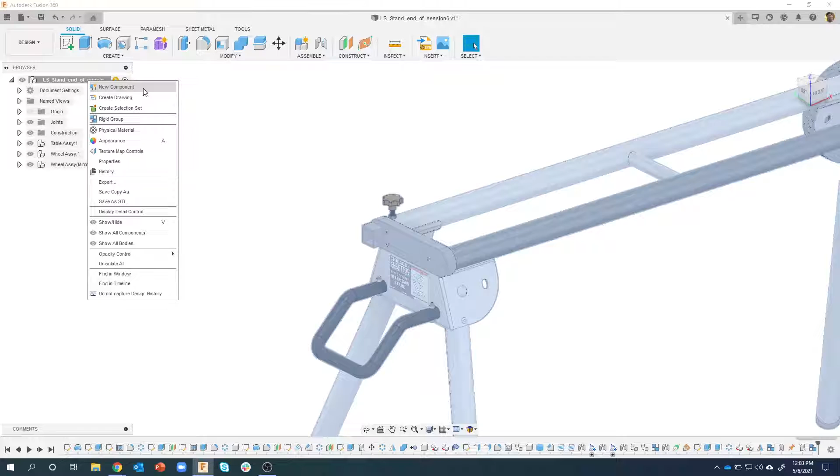I'm going to start by creating a new component, and hopefully you all know that components are awesome. We should be creating everything as components instead of just bodies. So I'll say new component and give this a name - I'll just call this extension arm. And now I have a new component that's active called extension arm.

So I need to create a tube, and I'm going to show two different methods of doing this. Recently we added the thin extrude feature, so I'm going to show that method, and then I'm also going to show the shell method.

So I'm going to create a rectangle here, and I'm just going to do it out in space because then we're going to end up moving the component into the correct location. So I need to draw a 30 by 30 rectangle.

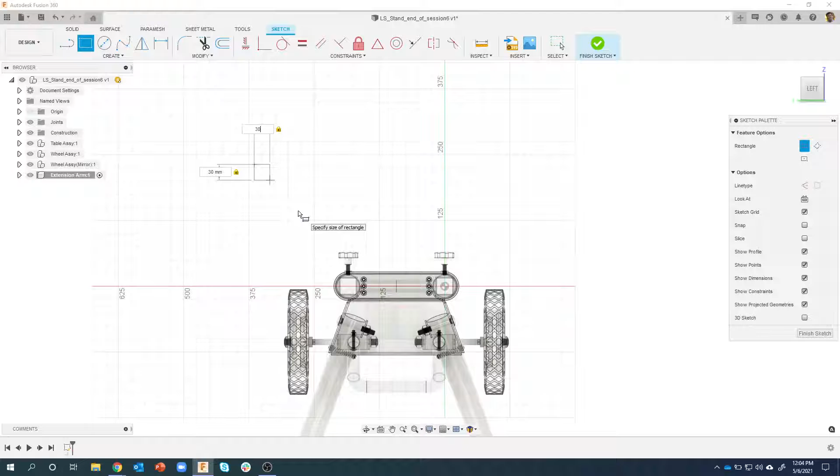Here's something kind of interesting. I could type in 30, hit tab, type in 30 and hit enter, and it's going to create a rectangle that's 30 by 30. Or, let me do a rectangle - I'm just going to create a random sized rectangle, throw one dimension, so I'll say 30. Then I want this wall to be equal to that wall, so I'll use an equal constraint. I'll say that and that have to be equal. And now you notice we have an equal sized rectangle.

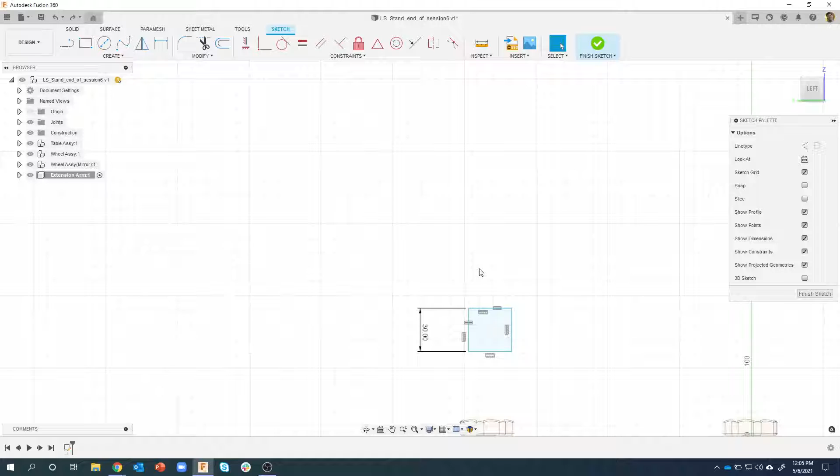So why would I do it like this? Well, if I ever wanted to change the size of it, there's only one dimension that I have to change. I say 50 - you'll notice this line also becomes 50. So it's a faster way of changing the overall size of an equal sized rectangle. I could have typed 30 and 30 separately, but then I'd have to change those two dimensions. That's one method. Now if I want to do the thin extrude but have filleted edges, I'm going to have to fillet in my sketch.

I personally don't like to use the fillet command in my sketch, and you'll see why here in a second. I'm going to go ahead and say fillet, click on an intersection or a corner there - you can kind of see the preview - and I want this to be a 2 millimeter fillet. Now I'm not going to hit enter, because if I do, it's going to end my command and I'd have to type 2 again. So I'm just going to continue clicking on these intersections.

And notice I get a warning: constraints and or dimensions were removed during this fillet operation. This is kind of why I don't like to do complicated sketches. Let me show you what happened here. I'm going to go ahead and hit enter, and notice my sketch has gotten a lot more complicated, with a lot more icons on the screen.

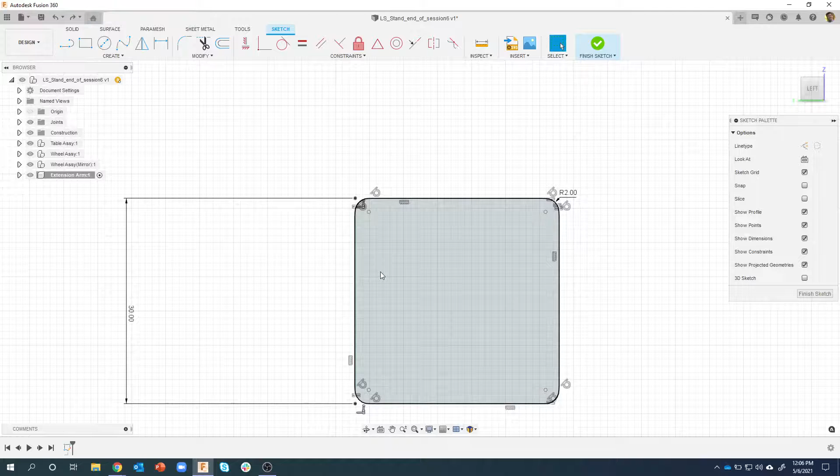If I were to change this from 30 to 50, notice that this line is no longer equal. The reason for that is because when I added these fillets, the equal constraint basically got removed or changed. So I would have to add that back in - I could say equal, I want that line and that line to be equal, which would still work because the fillets are all the same. In fact, you can see the equal sign on the fillets - they're the same as this one over here.

Now if I were to change this from 30 to 50, it should stay an equal sized rectangle, which it does. So that's one of the reasons I like to keep my sketches simple. Just keep it a simple rectangle and then do the fillets in 3D. That's how I would prefer.

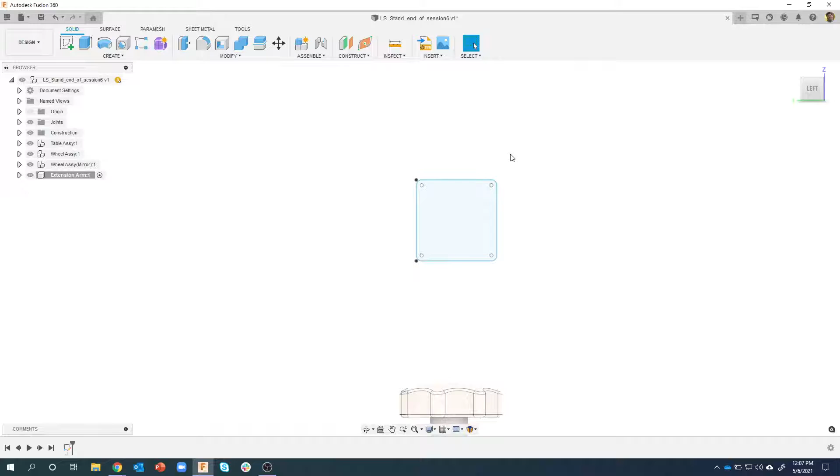But I needed to do this to use the new thin extrude. So if I select my profile and start to extrude, it's a solid. But if I click on this thin extrude, it makes it a hollow pipe, and I can specify what I want that wall thickness to be. So let's say 2 in this case, and you can see how it thickened that up.

Let me change that back to 1 so you can see. The reason you have to fillet the sketch is, notice how the fillet is on the inside here, so it basically offset that profile. That's why you do the fillets in the sketch.

Now I'm going to do a thickness of 2, and it basically gets rid of that because that's a fillet of 2 and that's a thickness of 2. So it doesn't really matter in this case.

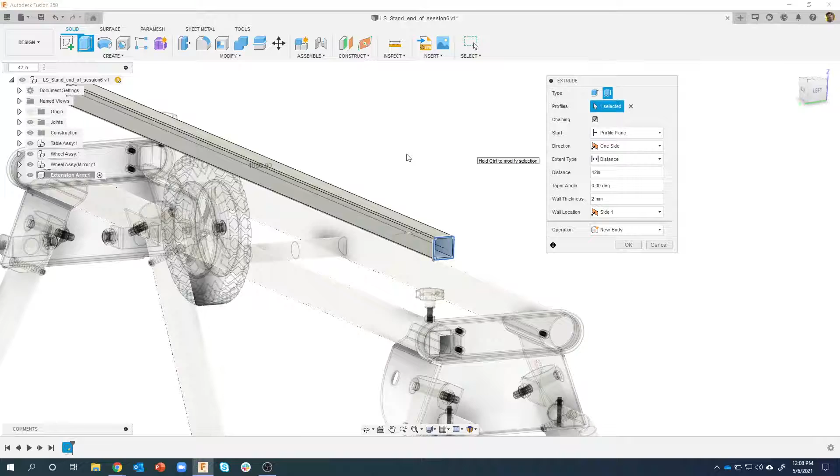Also notice my units are in millimeters. So by default I'm in millimeters, but I can also type in, for example, 42 IN, 42 inches. Let me zoom out so you can see what's going on here. It's going to convert that for me automatically, I don't have to do the math. I just type in 42 IN and it's going to extrude 42 inches. I'll say OK. So a couple tips there using the thin extrude.

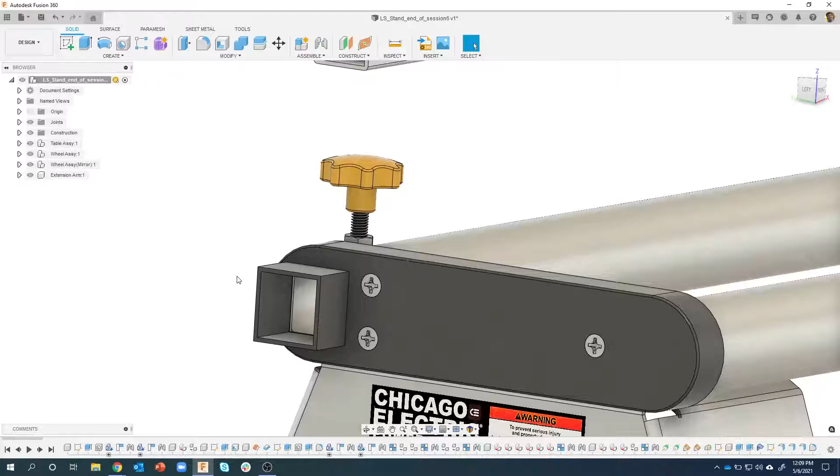Now we're going to do a couple pieces like this, and the next one I'm not going to use thin extrude. I want to position this bar where it needs to go. I like to put my joints at the top level, so I'm going to activate my top level here. I want this bar to be perfectly centered inside this box right here, and you'll notice I don't have a sharp outside edge to line up with a sharp inside edge. So we're going to use a command called between two faces.

So I'm going to create a joint. I'll move this so you can see it. This icon right here is between two faces, so check out how this works, it's really cool. I'm going to click on that icon. Plane 1, I'm going to select that face there. Plane 2, I'm going to select this face over here.

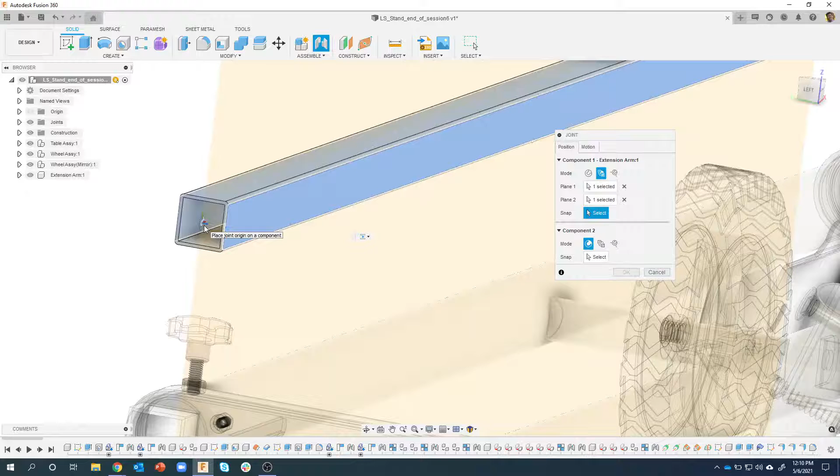Now it's asking for a snap. It's going to be kind of hard to see what's going on here, but you can see it's basically creating a plane that's slicing through between those two faces. Now it's asking for basically the origin. I'm going to do the middle, so I'm going to move this direction, and you can see that little joint icon is now in the middle. You can see the little arms right there. So all I have to do is get near the middle here and click. Even though I'm not even on that icon, I'm just going to click right there, and it grabbed the middle between those two faces, and it grabbed the middle of the length.

Okay, I'm going to do the exact same thing for the box over here. I want it to slide right in between the faces there. So I'm going to say between two faces, and select that face there and that face there.

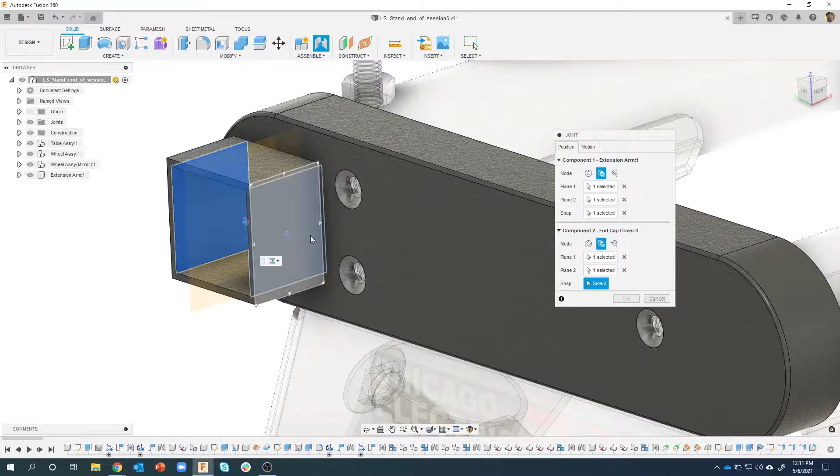Okay, and then if I zoom up on here, I can just hover over this face and it's grabbing the middle. So there's like a start, a middle, and an end right there. I'm just going to grab this one right here and watch what happens. Okay, so it brings the bar into the location.

Let me go ahead and animate this so you can see what's going on. You can see the center of the bar is now the center there, but obviously it's sliding in the wrong direction. So let's try the x-axis, and there you can see it's sliding correctly.

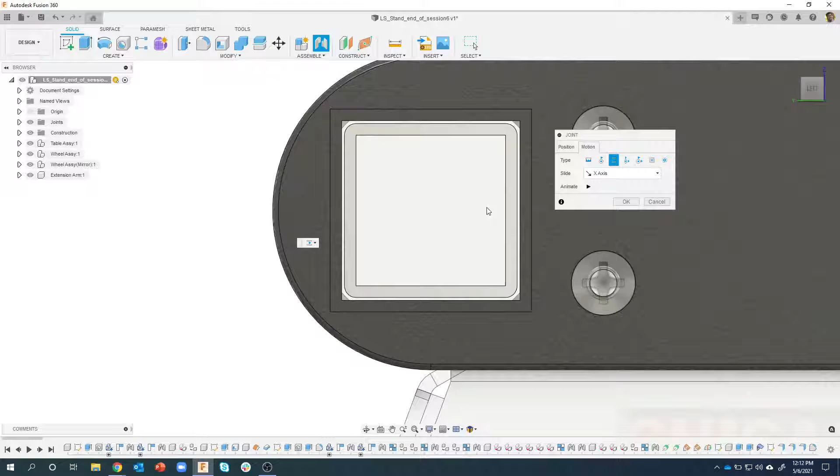And if we look at it like so, you will see that this light gray shape is perfectly centered, not only left to right, but up and down. So how is that possible? Well, we told it to find the center of this gray box and find the center of this black box, and that's how it did the up and down. And it also did the left and right because we picked on the left wall and the right wall, and it found the midpoint or the center of that. So that between two faces is a really powerful command.

I can position this bar wherever I want to offset at a certain distance, but in this case I'm just going to leave it kind of sticking halfway out. And I'll say OK.

So I now have a slider joint where I can slide that bar back and forth.

Now we're going to create the little arm that comes off of this, and I'm going to do this in a slightly different method instead of the thin extrude. So I'm going to create a new component and call it support arm.

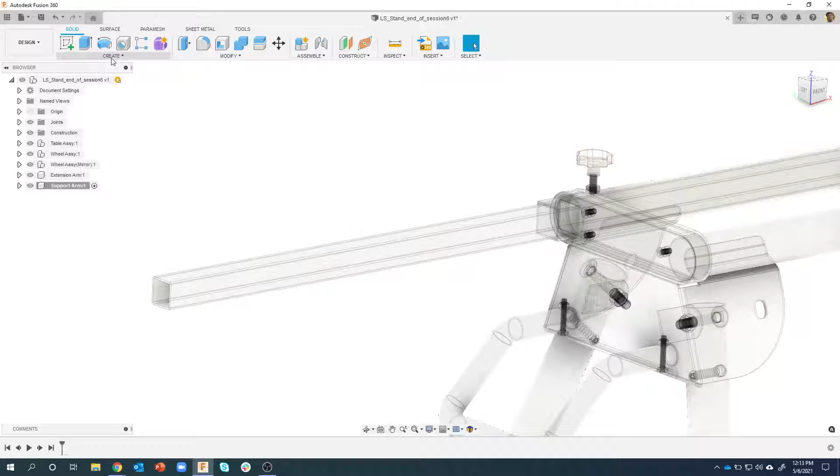So I'm going to use a box primitive. Instead of creating a sketch, drawing a rectangle, and extruding it, this time I'm going to create a box primitive out here in space somewhere, let's just do right here, and I want it to be 30 by 30.

In that situation I didn't have the option to add a constraint because I'm not in a sketch, so I actually had to type in 30 and 30. Now it's asking for a height, so I'm going to do 55, and you'll see it create a rectangular box, 30 by 30 by 55.

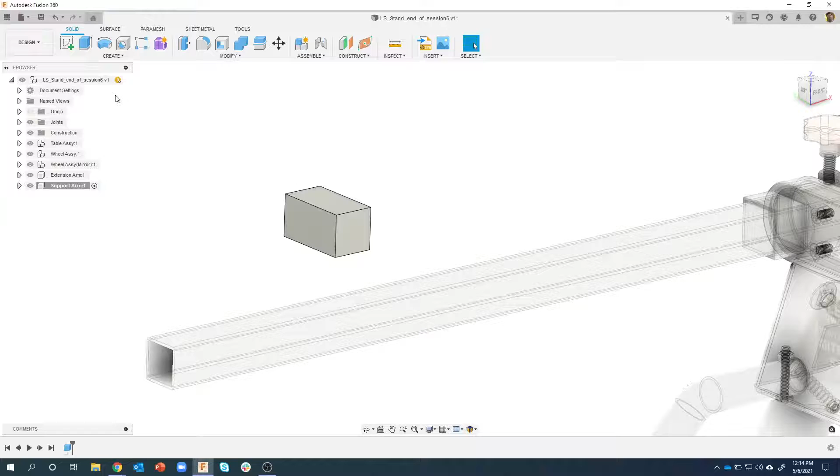Then I'm going to position this into place. Once again I like to activate my top level, add a joint, and check this out — I'm going to hover over this face, and you can see that little joint origin icon is right in the center. I basically want to line up the middle of this bottom edge, or the middle of this edge here, or a corner. You can see I can just hover over those.

Now be a little careful — notice as soon as I move onto the line, my joint origin goes flat along that line, but if I stay on that face, it's flat to that face. So I'm just going to grab that midpoint right there, rotate a little so you can still see that, and then come over here — you'll notice there's a top, middle, and bottom down here. I'm just going to grab the middle right there and watch what it does.

Now it remembers my last motion type was a slider, but I want that to be rigid. So it basically lined up the middle of this edge of the rectangle to the middle of the edge of the pipe, and I want it rigid, so you can see they're kind of welded together. And I'll say OK.

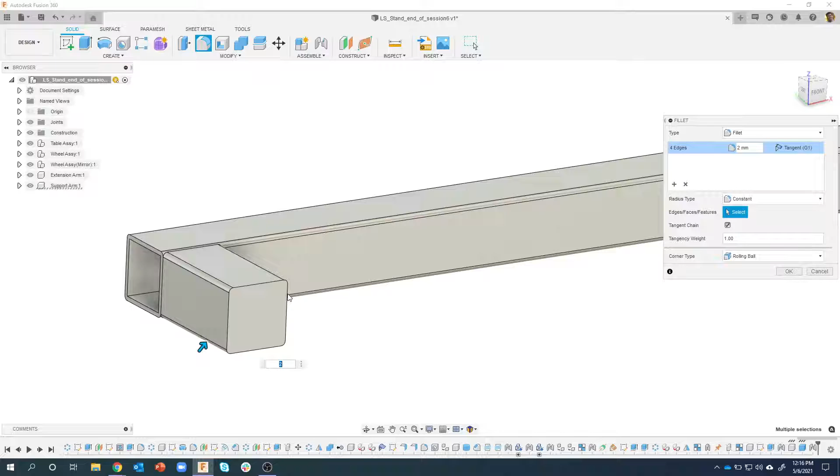Now I want to shell this guy out, but before I shell, I'm going to fillet these edges just in case. I'll say 2 here — I can even pick through my model, which I love, I don't have to rotate. And now I have a 2mm fillet on all 4 corners. I'll say OK.

Now I want to shell this out to be hollow, so I'm going to click on that face. And I just realized something — I kind of messed up. Notice I made this guy active, so my support arm isn't active. If I were to activate this guy right now, notice there's the fillet, right? So Fusion was smart enough to put the fillets on that support arm even though I didn't have that as my active component, and I think that is extremely cool.

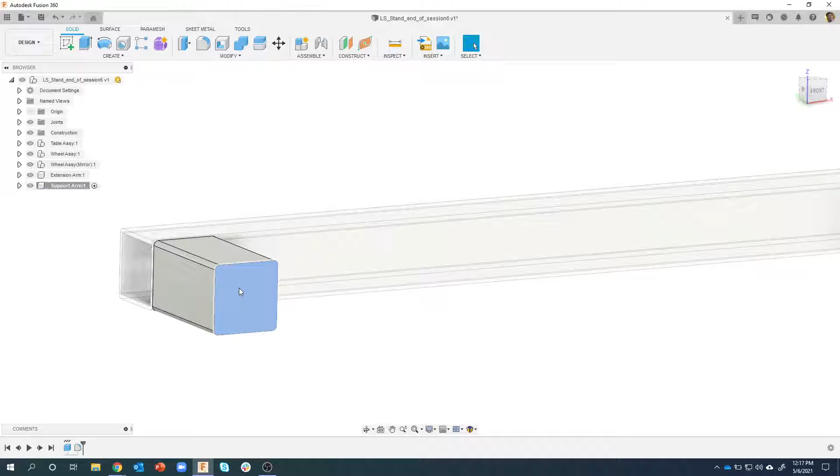I personally like to make sure I'm in my active component, and we can see we did a box primitive and then a fillet. Now I'm going to do my shell, so I'll click on that face and say shell. We want to do 2 millimeters, but now I have a problem — I need to shell the back face also, but it's buried or covered up by this other extrusion.

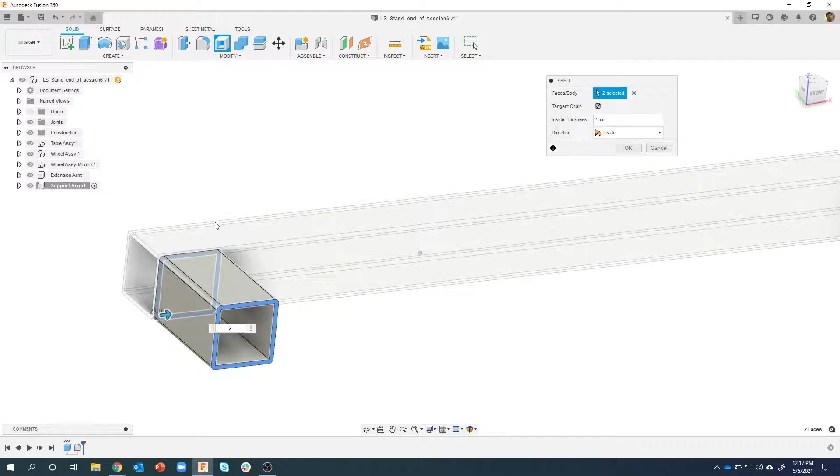Well, I'm going to click and hold for about a second, and you can see it found a chain, found a face, found another face — it's basically probing through. So I'm going to find that particular face, click there, and it is now shelling all the way through. In fact, if I turn off that extension arm, we can see it allowed me to select that back face that was buried by this other part. So again, that's just clicking and holding for about a second, and it allows you to probe through and pick different options.

Okay, so I now have a similar result as when we did the sketch with a thin extrude. Which one's better? I don't know. I personally like to keep my sketches simple, so I did the shell command, but that added a couple more features in my timeline—a fillet feature and a shell feature. With the sketch, I just have a sketch and an extrude, so less features in my timeline, but harder to go back and change the fillet size. I'd have to know to go back to that sketch. So again, it's whatever you decide you like.

I personally like to use the shell command and keep my sketch simple. In fact, I didn't even use a sketch—I just used a box primitive.

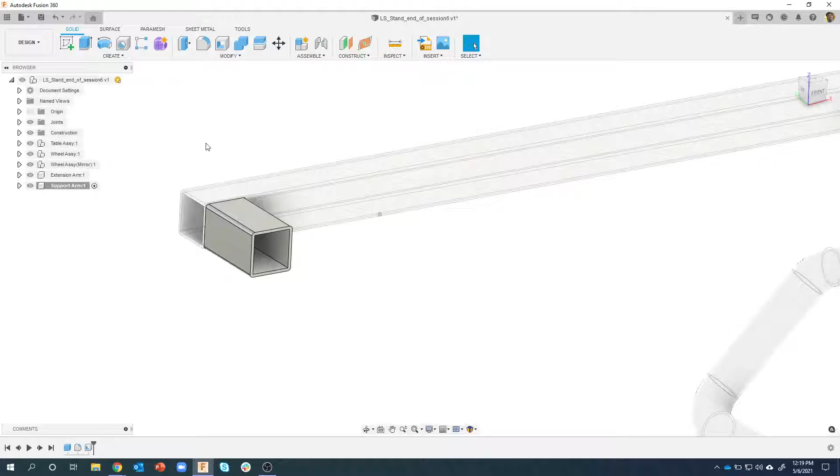In fact, I'm going to do that again for the next pipe coming up here in just a little bit. As I look at this, I decide I don't want this block to be right at the very edge because it doesn't give me a lot of room to weld. In fact, it only gives me basically this edge here, maybe these top two edges, but I want to have a weld over here. Well, let's go ahead and edit that last joint right here.

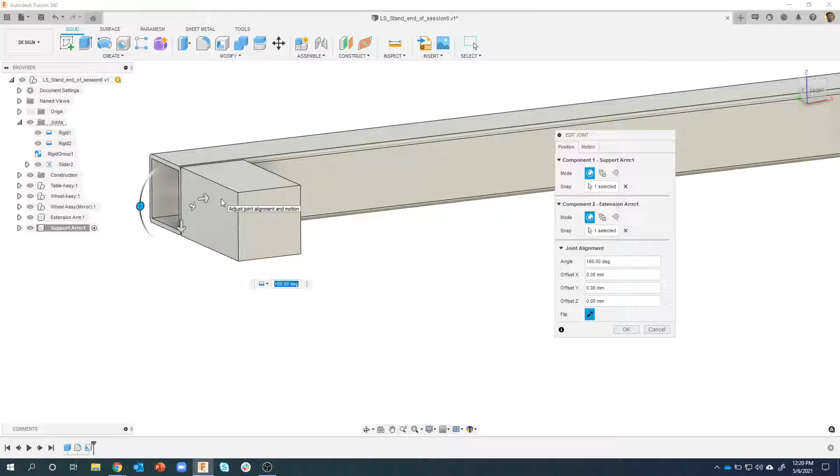I'm going to say edit joint. Now notice what happened—why is my part not shelled anymore? Well, we're going back in time. We created this box primitive, then positioned it into place, then filleted it, then shelled it out. So we're back before we did the fillets and the shell, that's why it looks a little different. Don't worry about that, we're just kind of back in time a little bit.

I'm going to start to drag this arrow, and you can see it allows me to drag in that direction, and I can specify an offset. Let's just give it maybe 8 millimeters or so. And then watch what happens when I say OK. It goes down through the timeline and completes the fillet and the shell. Now I have lots of edges that I could use to weld this piece on.

Okay, now I want to create like a little vertical arm. So I'm going to do the exact same thing. Right mouse click, new component. I'll give it a name—let's call it support arm vertical.

Okay, do another box primitive because I find that pretty fast. I'll do it on this top plane here, just draw it out to the side—again, doesn't matter. Now this one's slightly larger, 35 by 35 instead of 30 by 30, and it's 60 millimeters tall. So 60, there we go.

I'll go ahead and fillet, and this has a much smaller fillet, only 1 millimeter. I'm just going to go ahead and fillet those guys. Say OK, and then shell.

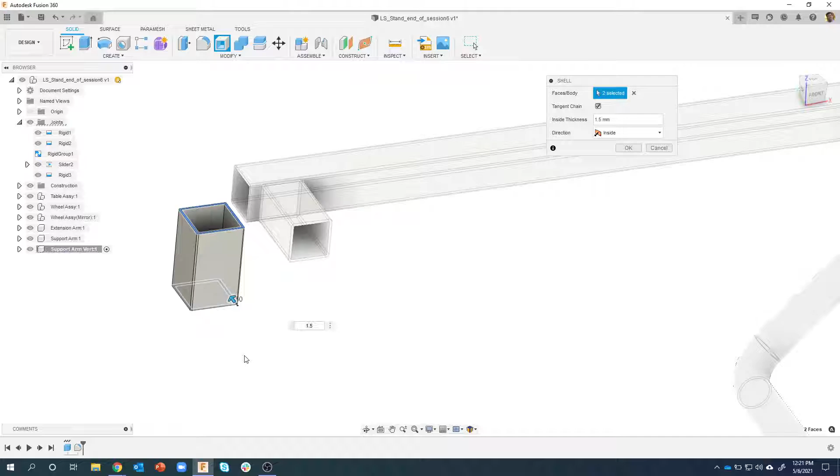1.5 for the thickness, so it's a little bit thinner metal. And again, I don't even have to rotate—I can click and hold and grab that face, and it's now shelling all the way through, shelled all the way through as I rotate. I'll say OK.

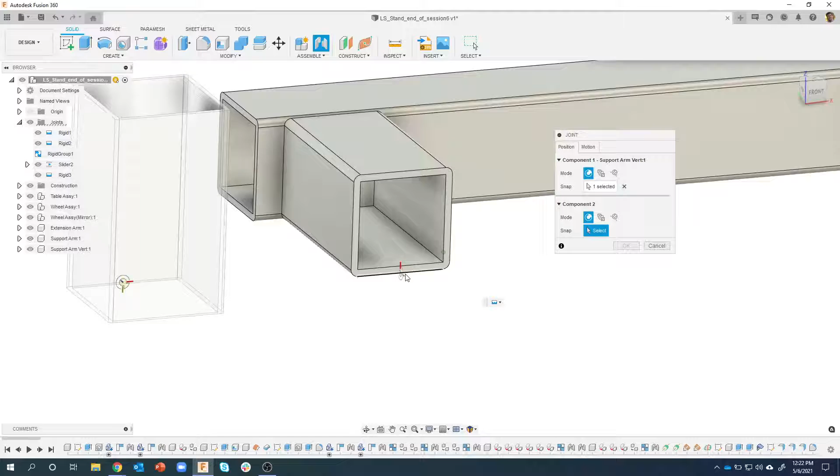And I want to go ahead and position this in the correct location. So I'll again activate the top level, create a joint, and I basically want this bottom edge—the center of that bottom edge—to line up with the center of this bottom edge. You can kind of see right there. Now I'm going to zoom out so you can watch what's going to happen here. Let me see if I can do this. There we go. So I'm going to go ahead and click there, and you'll see it'll bring that part and line those up, so it's perfectly centered.

And it remembered my last motion type as rigid. I'll say OK, and I now have that part located where it needs to be. If I grab this arm, we can see that all those pieces move together because I used the rigid joint command to build them in their location.

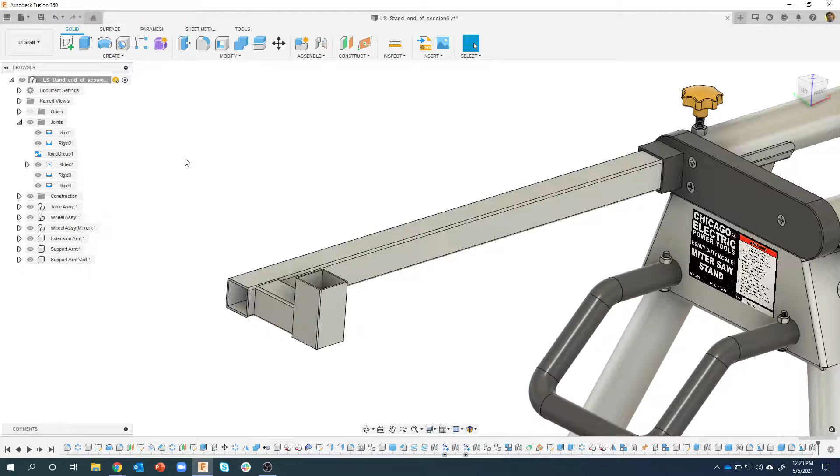Okay, you'll notice I now have the extension arm, the support arm, kind of all as separate parts. I like to keep things organized, so I'm going to create a new component, and I'm going to call this extension arm assembly. Now I can control or shift click and select all three of those and drag that into the extension arm assembly.

If I expand that open, there we go. This is a really quick way to turn multiple things on and off. So if I turn the assembly off, everything underneath it has to get turned off.

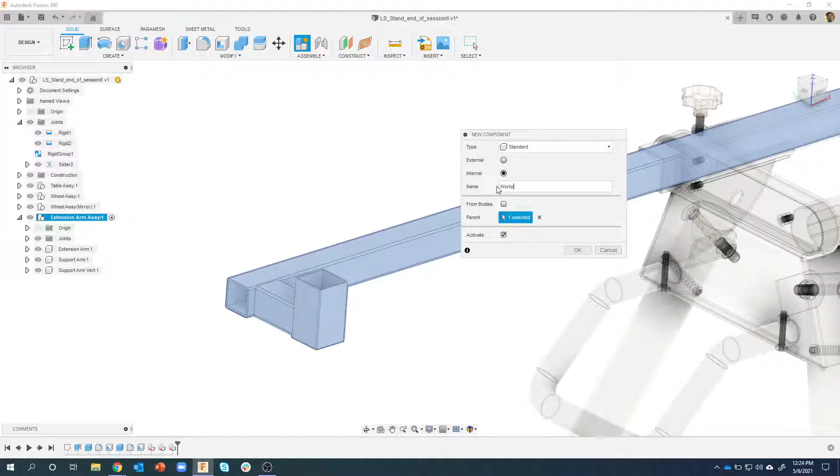I also know I'm going to continue designing some stuff here, and I want it to be in this assembly. So instead of right-clicking up here and saying new component, I can right-click on this extension arm assembly and say new component, and it's going to create it underneath this assembly. So I'm going to start doing a workpiece support. Let's call this workpiece support assembly.

You can see I now have this workpiece support assembly in there, and underneath there I'm going to create the roller. I haven't even drawn anything yet, I'm building the structure. So I know I'm going to have a roller in here, so I'll give that a name. Now we're working on the roller component in the workpiece support assembly, which is in the extension arm assembly. You'll see why I'm doing this later on, as we can turn things on and off really easily.

I'm going to create a primitive, a roller, which is basically a cylinder. So I'll say cylinder, and do it on this front face, out here in space a little bit. I want this to be 48 millimeters in diameter.

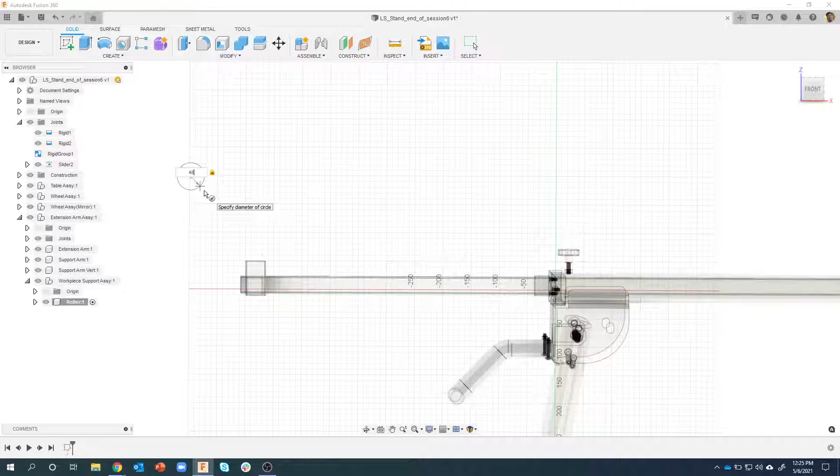But for the height, I love showing this, I want to do inches. In fact, I want to do some weird inches. I'm going to say 9 7/8 inches, and you can see it instantly updates and gives me my preview. I did 9 7/8 inches and didn't have to do the math or anything like that. So I'll say OK, and we get that guy.

Now I want it to be hollow, so I'm going to have to shell it out. Some of you might ask, why didn't you use the pipe command? I could have, but notice what the description says: creates a solid pipe that follows a selected path. So yes, I could have specified a wall thickness and all that, but I'd have to have a sketch that defines the path. So instead, I'm just going to do a cylinder.

We'll do the shell command. I'll go ahead and probe through to grab that guy, and let's do 1.5 thickness for the roller.

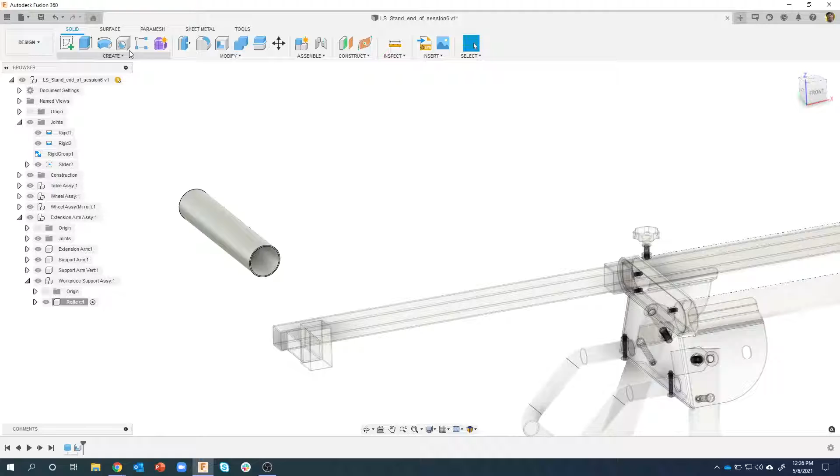So pop quiz: how many times have I had to go to the top here to click any icons? Hopefully you've noticed hardly at all. In fact, I don't think I've even gone up there yet. I might have once or twice, but I've been doing everything with my right mouse click - the shell command, the new component command, and all that kind of stuff. So definitely get used to right mouse clicking and seeing what options you have. It really speeds up your design process, and you don't have to hunt for commands you don't know where they might be.

Okay, I now have the cylinder and I want to create a rectangular tube that's going to come up and touch this round surface here. And I know it needs to be 9 inches long.

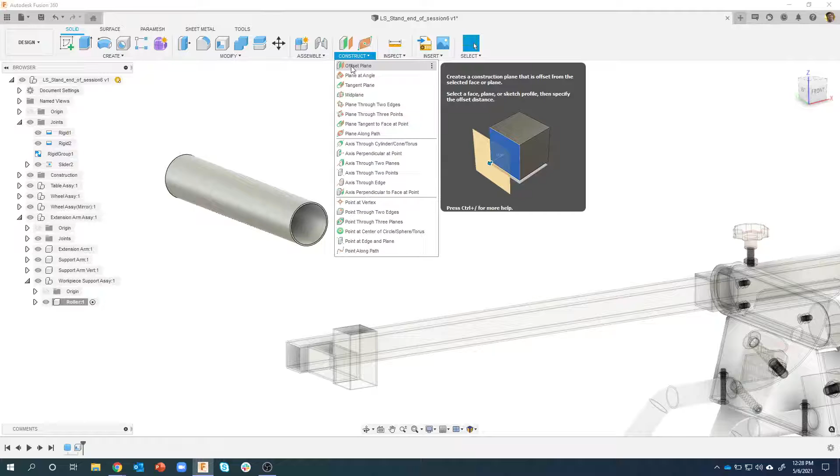So I need to create an offset plane from the center of this cylinder. If I come into construct, you can see offset plane, but that needs to come from a face or a plane. I could do plane at an angle, but it's asking for a line. I don't have a line. Well, I could try tangent plane - that kind of works, but it's on top of the part, and I want it to slice through the middle of it. So none of these are really going to help me.

However, I'm going to do an axis through a cylinder. Check this out - I'm going to say axis, and click on the outside face, and it created a line. If I say OK, just like a construction plane, I can change the length of these by clicking on the endpoints if I want to, so I'll drag that a little bit larger.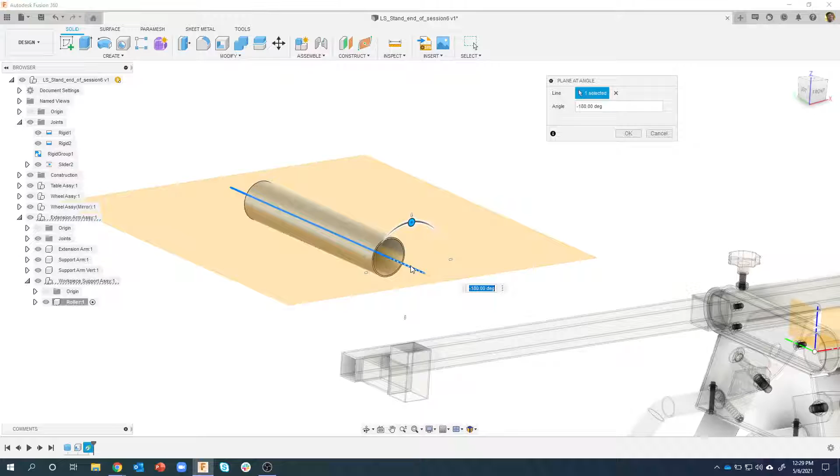Remember plane at an angle? It says creates a construction plane through an edge or an axis or a line. So now I can say plane at an angle, and click that line. By default it's at flat, or -180 right there, and it's right through the middle of my cylinder, which is exactly what I want.

I'll go ahead and shrink this down a little bit. I don't need it to be quite so big. Now I have a plane that I could offset.

I want it to be 9 inches, so I'm going to type in 9IN. And you can kind of see that jumps down 9 inches, or 228.6 millimeters. I'll hit OK. Now I have a plane that I can sketch on, and we're going to grab some information to help us here.

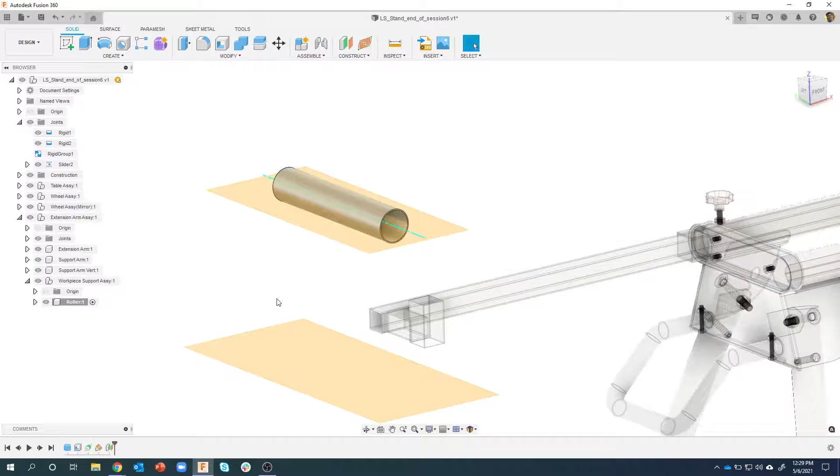So I'm going to create a sketch on that bottom plane there. Let's just rotate it. I like to look at it kind of in this direction. I want to grab information from this cylinder.

So P for project. And I know I've shown this multiple times, but with specified entities, if I were to project this cylinder, it will only project the edges. So let me turn off the roller body. You'll see that it only projected the edges of the cylinder. That's because there isn't really an edge right there. So I'm going to undo.

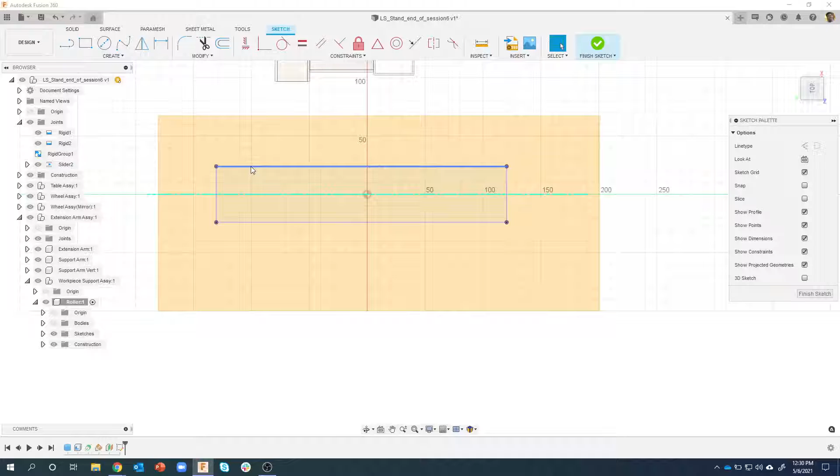I'm going to do P for project again, but this time I'm going to change it to bodies. I'll click on that and say OK. And now you can see that it projected almost like a silhouette of that body, and so I did get those outside edges. So once again, in the project command, usually you're using specified entities. In this case, I said project bodies.

Then I want to create a centered rectangle. Now, it looks like my origin is correct. I don't want to assume that. Let's pretend that that didn't happen. So how would I get a centered rectangle? Well, I'm just going to draw a line.

I'm going to change my line type to construction. I'm just going to connect the dots. So I'm going to draw a line like so and a line like so. And notice the result, notice where the center of the cylinder actually is. It is not right at that origin, even though it looked like it was.

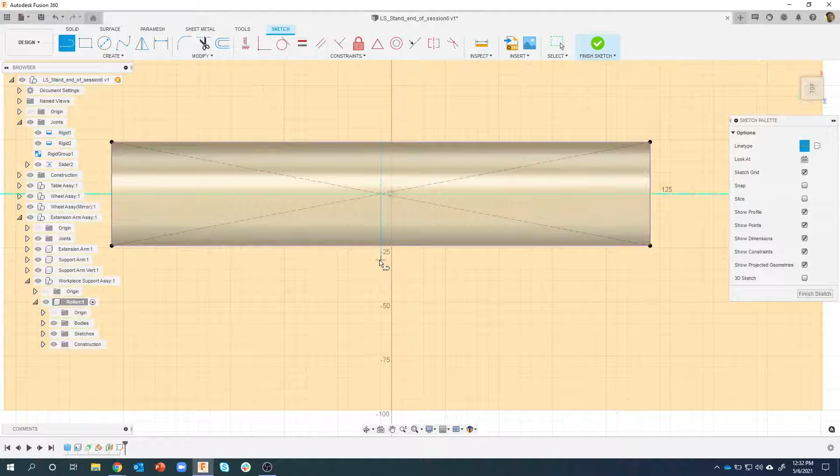So definitely make sure you're doing things correctly. Don't assume that things are perfectly lined up, or it's going to catch to the corner even though I didn't project geometry, that kind of stuff. So definitely check your work. And here's a prime example.

Okay, so now I can do my rectangle. I don't want it to be a construction line, I want it to be centered. I'm going to grab that intersection right there, and you can see how it finds the midpoint.

And I'm going to type in my 30 by 30, so I'm going to just do 30. I'll hit enter. Say I want that to be equal to that, and there we go. Hopefully that makes sense. So I can finish my sketch.

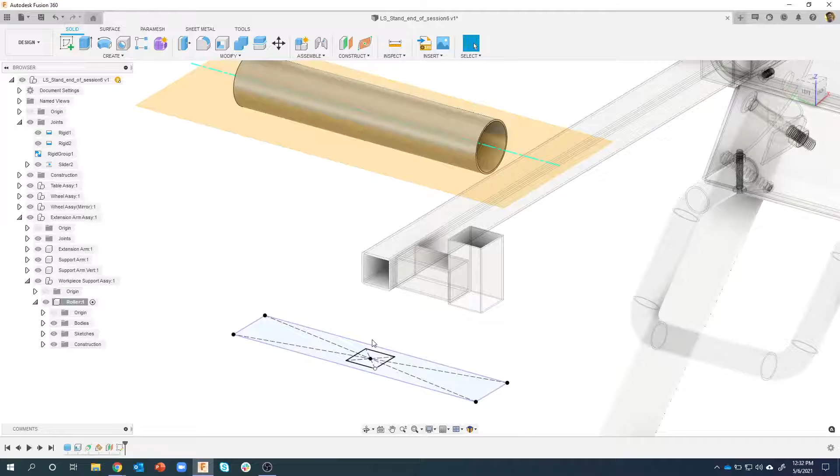And we can see that the sketch is down here. I want to extrude up and have it match that rectangle. So I'm going to turn off, I don't need the construction geometry, so I can turn off my little eyeball next to the construction. I do need my sketch, so I can't turn that off yet.

I'm going to say extrude, I'm going to start to drag. Okay, now how far do I need to go? Well, instead of distance, I'm going to say to object. And I'll just click on this object, and you can see what it's doing. It's actually extruding from that profile plane up to this object, and it's even kind of wrapping around it to make that work.

Okay, now I made a mistake. I didn't create a new component, so it's wanting to join. I'm going to say I don't want it to join, I want it to be a new component. So I could just do something like this and say OK, and you'll see that it created a new component that's separate from the roller.

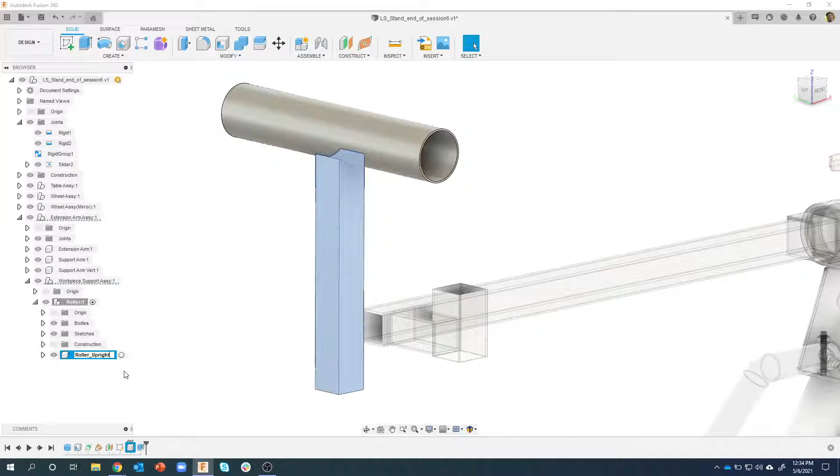So you do have options. So let's go ahead and edit this, and I'm going to call it roller upright or something like that. Okay, and I'll activate that component.

We'll fillet these edges. A lot of these have kind of rounded corners. So I grabbed all 4 corners. I'll say OK.

I'll do my shell command. So I click on that face and do a shell. And let's do 1.5. I also want to shell this side, but you'll notice like this part's in the way.

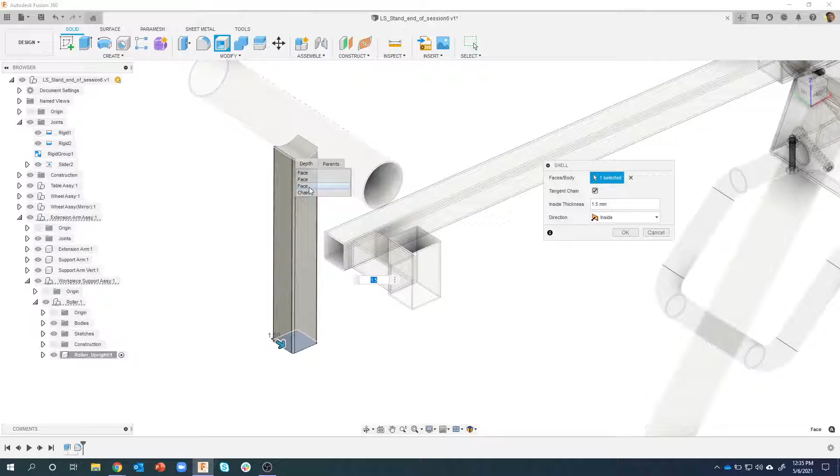So once again, I'm just going to click and hold like so. The first face it hits is the cylinder. The next face it hits is the inside of the cylinder. And then the next face it hits is that curved surface. So I'm going to select that, and now you can see, sure enough, I was able to select that face, and it's hollow all the way through.

So if I turn off that roller, we can see that's our shape. Okay.

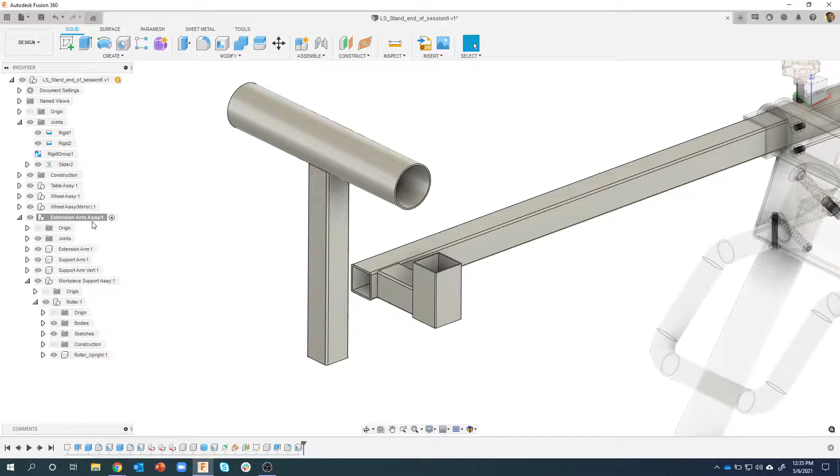Now, if I try and move this guy, you'll see it moves together. I want to go ahead and position it where it needs to go, and I'm going to use that between 2 faces again, in this extension arm assembly. You'll notice it has its own joints folder, and since this joint is kind of related to the extension arm, that's where I'm going to do it. So I'm going to activate that joint.

Let's go ahead and specify that it's going to be a slider joint, between 2 faces. And here's a tip that I use. Which component do I want to move? Well, I want to move this guy. And where do I want to move it to? I want to move it to this component over here. So that's kind of how I remember which faces do I click first.

Well, this is the one I want to move. I'm doing between 2 faces, so I'll go ahead and select that. And again, just for fun, not having to rotate, I can probe through and grab that other face. Okay.

Now, it doesn't look like I selected it correctly, so I didn't. Let me go ahead and click and hold. So that's the first face. That's the second inside face. There's the inside face, and then finally the outside face, which is what I want. So I was able to select both of those faces without rotating.

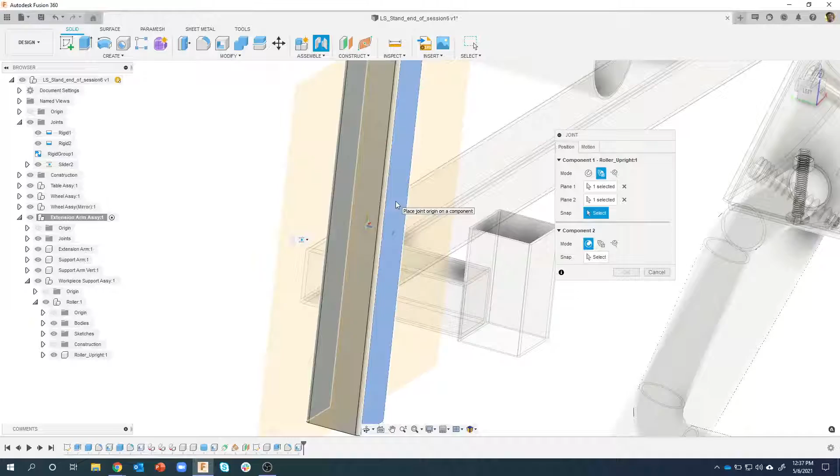I kind of get near the center. I'm going to rotate isometrically so you can see what's going on. You can see that point is in the middle between those two faces. So I'm just going to click right there, and that's where it grabbed it from.

Where do I want to go? Between two faces, same thing. I can do that guy there. Click and hold, that guy there. Never even had to rotate. Hover over this face, we can see that center mark. I'll go ahead and click.

Now you can see it did a quick little animation, but it's in the wrong location, and notice the curve. That's interesting. So how do we fix this? Well, I don't want it to go in the Z-axis, I want it to go in the Y-axis, so that looks good.

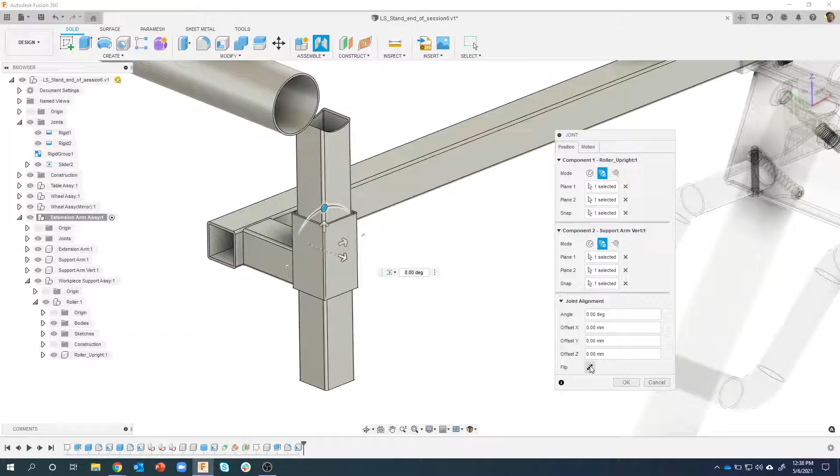And in the position, I'm just going to hit this little flip icon, and you can see, sure enough, it flips the orientation. I'll say OK, and you'll notice that it did not move that component, which is unfortunate. Why did it not? Well, when I did the extrude, I just said extrude to that object. I did not do anything related to like a rigid joint or a rigid group or anything like that.

Okay, so I'm going to step back there. I'm going to keep that slider joint. I don't want to have to undo all those clicks that I did. So I'm going to just step back, and right now I'm going to say rigid group, that guy and that guy, and say OK. Notice what it did. Here's my shell, then there's my rigid group. Now I'm going to step forward, and it moved. Okay, hopefully that made sense.

There will be times where you make a mistake and you think, oh, the easiest thing to do is just undo and redo it, and that might be the fastest. But here I did lots of mouse clicks for the between two faces and all that kind of stuff. I didn't want to lose that. So I just went before that in time, said let's group this together, and then moved back to the future, I guess, and let that joint type update. And because it knew the roller part had to be rigid, it moved with it. So kind of a cool little tip there.

Okay, so I see a question that came through. Somebody said, do educators get Fusion 360? Is it free? So yes, if you go out to the Autodesk Fusion 360 webpage and scroll down near the bottom, it'll show you the different types that we have, like the education version, etc. So I would recommend doing that, and that will walk you through. All you have to do is have an Autodesk ID, which is free.

Okay, so I now have this guy, and you can see it slides up and down, and then the other extension slides in and out of the frame right here. So we're getting everything kind of working. So the last thing I want to do here is create those roller parts.

So it is a plastic part that kind of slides into the side of this. I'm going to create a new component under this workpiece assembly, because it's kind of part of this assembly.

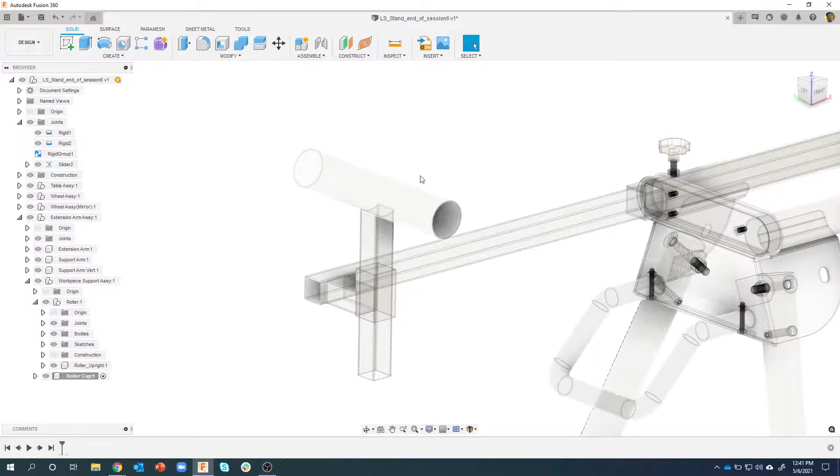We'll call this guy roller cap. Okay. And then I'm going to create a sketch. Let's just click on this face, create a sketch.

Now mine automatically projects the geometry. You can kind of see those black lines, so I don't even have to project. I'm going to just say finish, and you'll see that there are actually profiles that are already projected.

That is a preference I have turned on in my preferences. Some people like to have it automatically project, some people don't. I think it is 'auto project geometry on active sketch plane' under the general design settings. By having that checked, it automatically projected the geometry, and now I can come in and select these two profiles and say extrude, without having to project them.

How far? Let's go ahead and do 7 millimeters out.

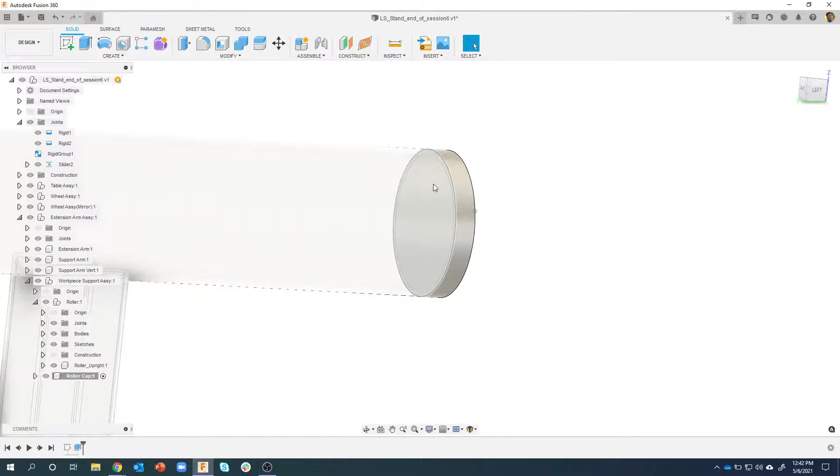Okay, then I want to grab the profile that's in here, but if I click and hold, I don't see profile. That is because by default, your sketches get turned off once you use them, as it assumes you're done with it. In fact, you can see the eyeball next to sketch 1 is turned off, so I'm going to turn that back on. Now if I click and hold, you can see it selects the faces, but I have an option in here for profile, so I'm going to click on profile.

Extrude. I'll start to drag so you can visually see what we're doing here. We're basically creating a cap that's going to go inside this cylinder, and that's going to be, I think, minus 20. Let's just say, yep.

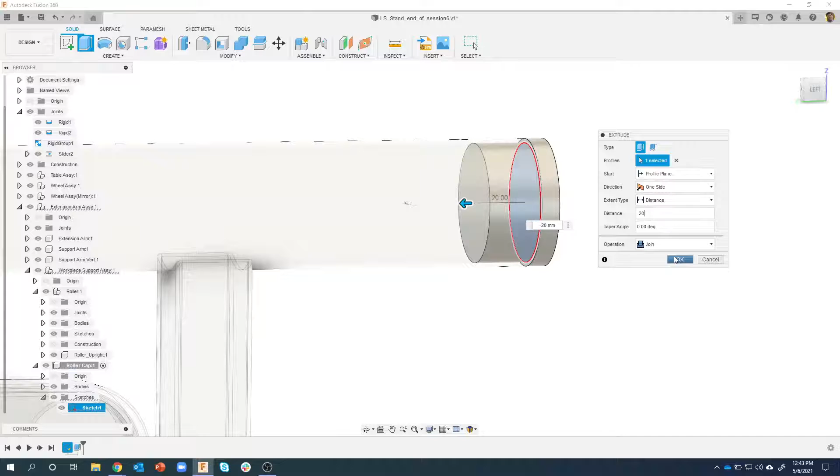And there we go, and I'm still just working on this roller cap. Everything else is kind of ghosted out. Let's fillet this edge, it's kind of a nice rounded edge, 4 millimeters. And you can kind of see, just really quickly, we've basically created this plastic cap.

Now there's some really cool stuff going on with this cap in real life. I wish I could show it to you. I don't have it behind me in my camera anymore, so you'll have to just see what the final product looks like. So I need to add some geometry onto this cap here.

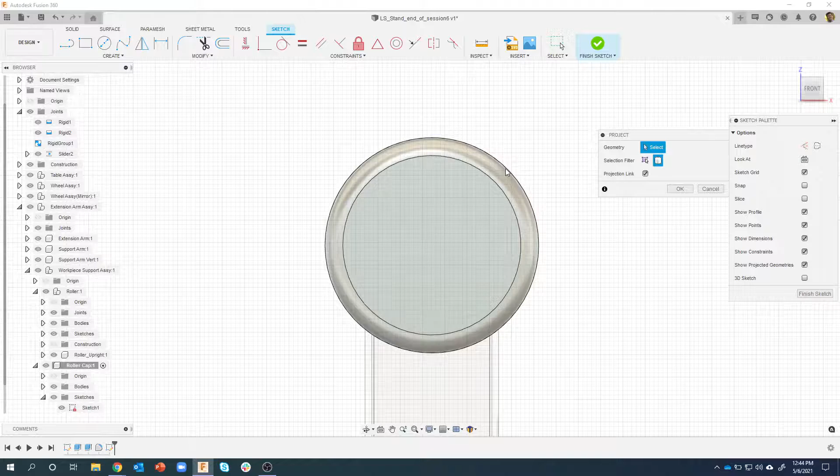So I'm going to create a sketch on that face, and I am going to project. I want to make sure that I'm grabbing some information here, so I am going to project that face because I want to get that center point right there.

I'll create a circle, 20 millimeters in diameter. I'll create another circle, 16 millimeters in diameter. So I get something that looks like this.

What we're going to do is basically create some notches that are cut into this part, and there's 3 of them. So I'm going to just create a rectangle. I could go to the menu, or I could hit R for rectangle. And I'm just going to draw a big rectangle, something like that.

Okay, then I want to make sure that the upper left corner, this corner here, always is touching this circle. So I'm going to say coincident, that corner and that circle, and you can see how it moved that point onto that circle. And then I'm going to say the same thing with this lower right corner, that it needs to touch this circle. You can see my rectangle's changed now, but as I change the size of this rectangle, you can see that sure enough it's keeping those points coincident.

Now I'll go ahead and dimension this. I want it to be 3 millimeters, so I'll throw a dimension on there and say 3. And then I want it to be centered.

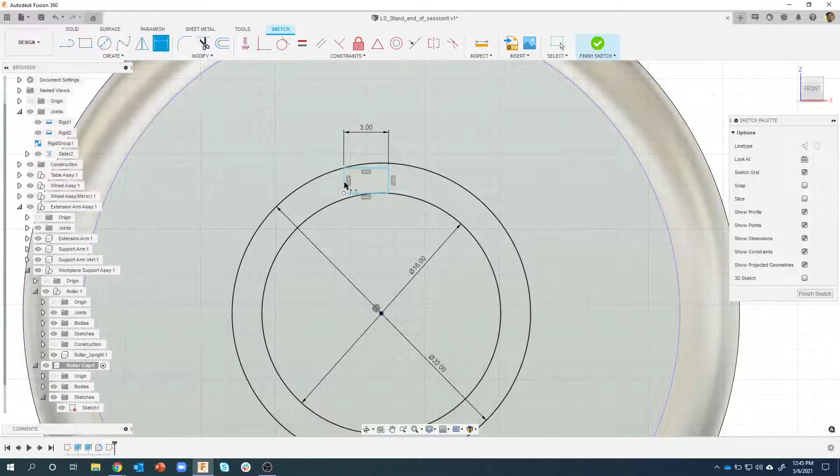Now I show this tip all the time where I draw a line, a construction line, and then make it vertical, and every single time I do that, people are like, do you know about this other tip? And I always forget about this other tip, so now I'm going to remember it and show it to you. This is the old way: I could come in here and create a construction line, get near the center of this rectangle, let me zoom up here, and you'll see that little triangle appear. Okay, and then I go to this point here.

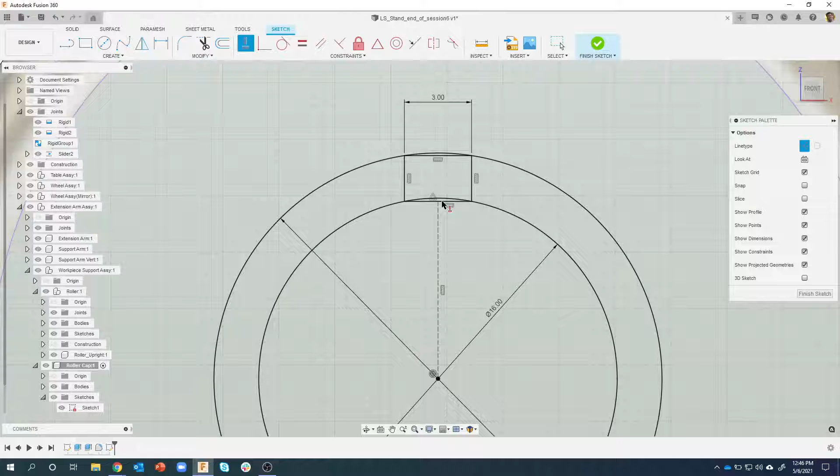Then I say I want that line to be vertical, and watch what it does. Sure enough, that point has to stay centered or at the midpoint. Those have to stay coincident, so it gets fully constrained. But that was a lot of clicks and adding extra geometry.

So check this out. Instead, I want the center of this line to be vertical with this point down here. So I'm going to say horizontal vertical. I'm going to click this point here, and then zoom up so you can see what's going on. I'm going to hold down my shift key and hover over this line. Now you don't see anything happen until I get near the middle, but it's snapping to the midpoint.

So holding down the shift key, you'll notice nothing happens if I'm not holding it down. But if I hold down shift, it'll snap to the middle, and sure enough, it made the middle of that line vertical with the origin. So instead of having to draw that extra construction line and do a vertical constraint and a midpoint and all that kind of stuff, it saves some time. But you have to remember to hold down the shift key to make that happen. It's a cool tip, I really like that.

I want 3 of these guys, so I'm going to do a rectangular pattern—I'm sorry, circular pattern. I'll draw a box around that. What's my center point? That's my center point. By default it does 3, and we can see the little preview of what that's going to look like. I'll say OK, and what that basically did is create these 3 regions right here.

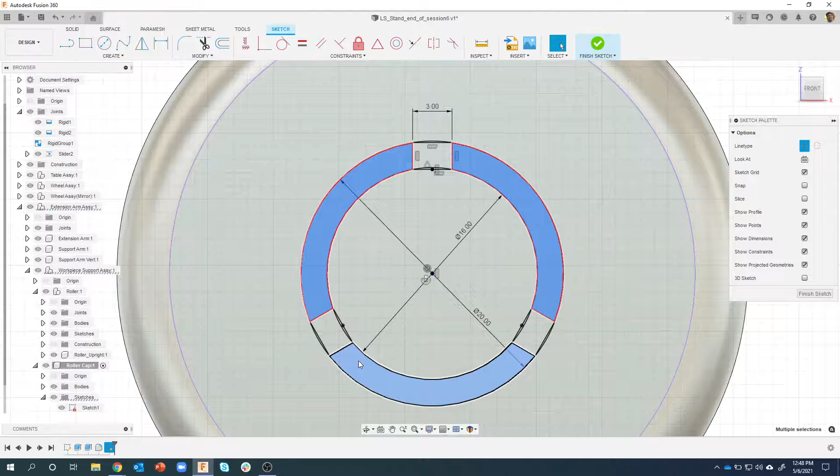That's what I'm aiming for. The next thing I want to do, since I'm in my sketch, I'm going to prepare for a whole bunch of divots that go all the way around. So I'm going to create a line, and I want it to be a construction line.

I want it to be 14 millimeters vertical from the center. So I'm going to start to draw, and you can see I can rotate slightly, and it's going to snap vertically, and then I can type in a distance of 14, and that's going to create a construction line that's vertical. And I can use that to draw a circle at the endpoint right there.

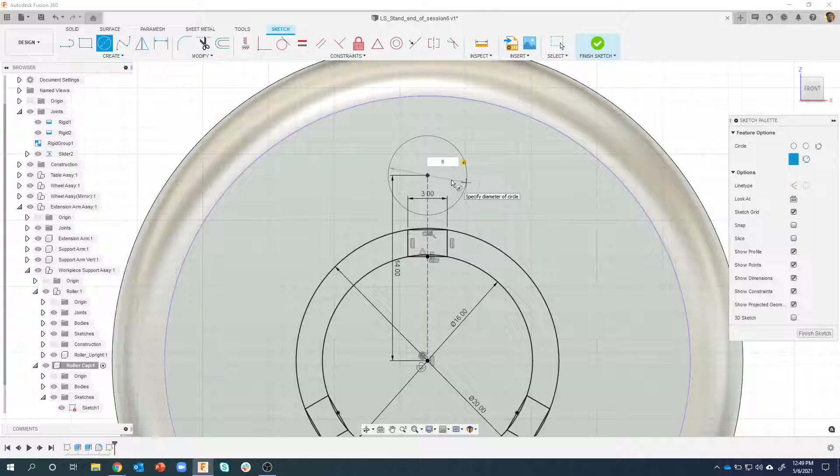Now, I'll foreshadow, this is going to come back to bite me a little bit, and you'll see how we're going to resolve that. But I'm going to go ahead and draw a 6 millimeter diameter circle, like so, and finish my sketch. So I used that time to get this stuff going, and also this location for these divots, which you'll see here in just a minute.

Okay, let's go ahead and select these profiles, extrude. How far? I like to start to drag to show the direction, and then I can type in my distance. Let's just say -3. Okay, so we made those little indentations.

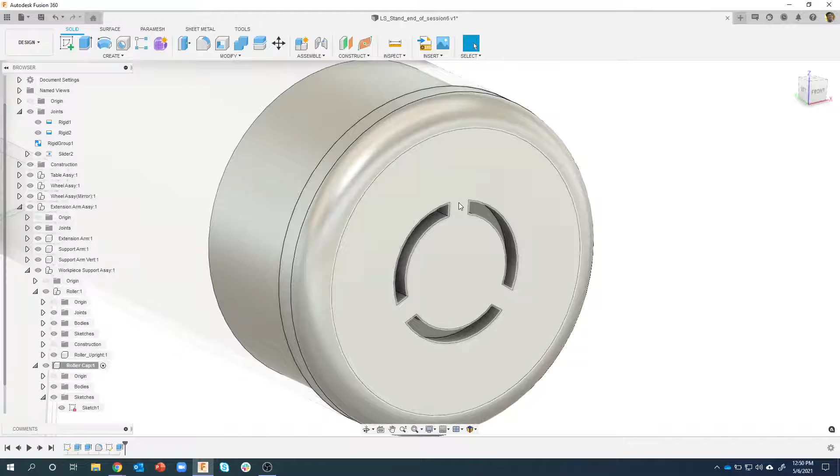I also want to have a hole that goes through here. So I'll use the hole command, click on the face just randomly, and then watch what happens when I move this around. You see that white dot? That's the center of that face. So all I have to do is drag that blue dot, and it's going to snap right to that white dot, and I know it's perfectly centered.

It remembered my last size. Let's just pretend it said 15. I want it to be 12, so I'm going to say 12. And I want it to go all the way through the cap, so I'm just going to say all. It's going to figure out what it needs to do to go all the way through the cap, and that's all I need. I'll say OK, and we can see, sure enough, it went all the way through the cap.

Okay, now I want to create these indentations. So let me turn this sketch back on. I basically want to revolve and cut that away. So I'm going to say revolve, and it says, what's your profile? That's my profile. And then what's the axis?

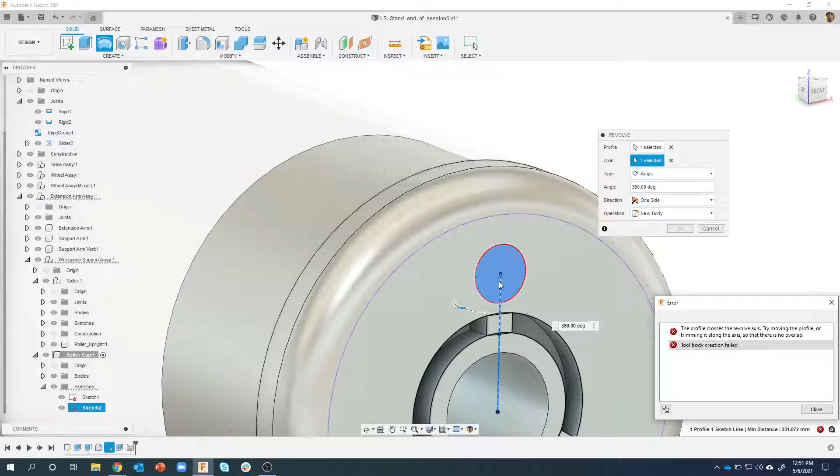Well, I'm going to say revolve around this axis right here, but you'll notice I get an error message, and it basically says the profile crosses the revolve axis. And it does—if you look at this, it's this whole circle kind of revolving on itself. What I really want is half of a circle to revolve.

But you'll notice I dimensioned this center line here, or this construction line, so I don't have a great way to get half of this. Well, I could draw an extra line. Let's just do an extra center line from here up to the top.

Okay, now I have a point there and a point down here that I can use to break. This is actually a pretty cool command. Watch what happens when I hover over this arc, or this circle - you see those two little X's appear.

It's going to break this line segment wherever the other line segments cross over it or touch it. So I'm going to click there, and you'll notice this is broken in half.

Okay, let's finish the sketch. Notice it's still all one profile. So what do I need to do? I can come in here and change these line types to not be solid, or construction, and now you can see I have half of a circle. So I didn't have to redraw. I mean, I could have drawn a solid line from there to there, I could have, but it wasn't necessary.

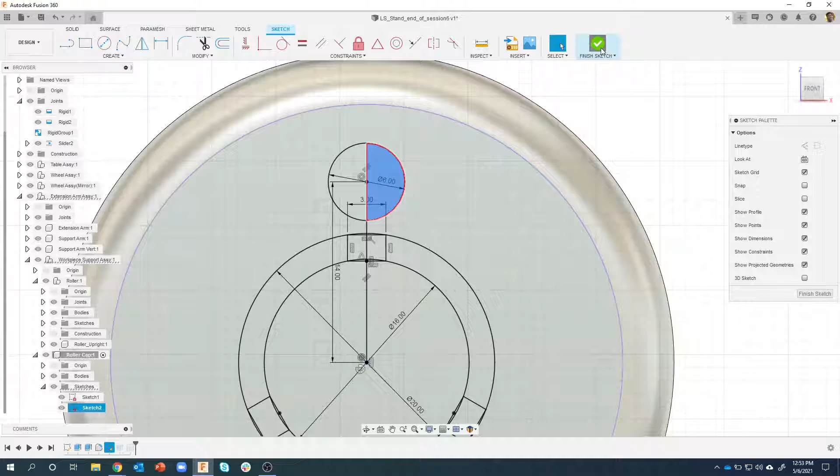Okay, so now I'm going to come into Revolve. What's my profile? Now I have half of a profile. What's my axis? I can click on that edge there, and sure enough you can kind of see what it's doing - it's taking that profile, and because it's intersecting, it's doing a cut. If I said join, it would create a sphere like so, but we want to do a cut, and I'll say okay.

Let me turn off the sketches so you can kind of see what it did. It took that half moon, revolved it around, and it scooped that out.

We'll come in here and do a circular pattern. By default it's usually set to faces. Could I just select this face? Yes, I could, but honestly I always try and do features. And I can say this revolve feature - that way, if I came back and changed that revolve feature by adding extra faces or whatever, I don't have to go back and select those extra faces. It's going to grab anything that has to do with that revolve feature.

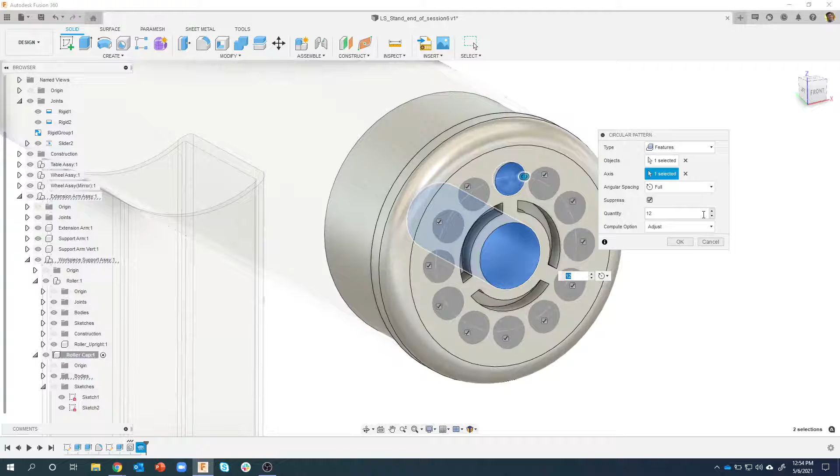So I'm going to say features. What's my axis? I'll just do this guy here. It remembered my last number - usually it's 3. I can drag this little arrow here - you can see in the plus direction I can do that, or the minus direction, or I can come in and type. And I'll just say okay. Now we have those little indentations in there.

Okay, almost done here. So I'm going to turn off this roller body and create a sketch on this back face. We're going to create some indentations that allow it to slide into the roller much easier. So again, I'm going to project some geometry here.

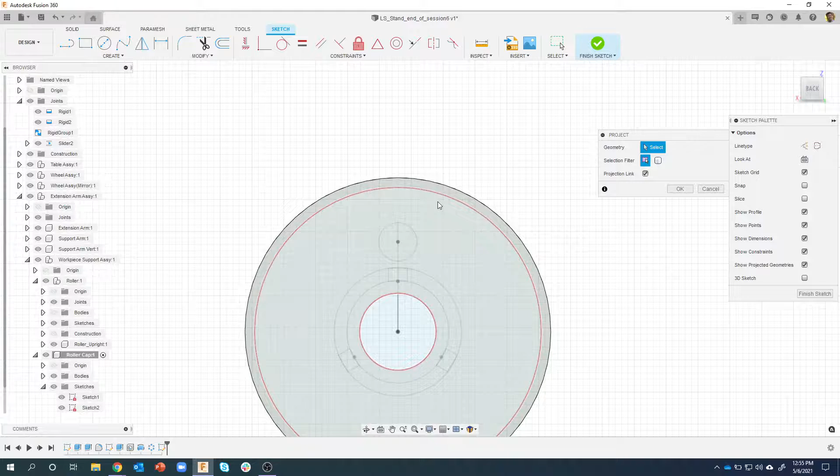Draw a rectangle, and I'm just going to kind of draw it out here in space. And I want it to be 1 millimeter tall, 6 millimeters wide. And I want it to be vertically constrained. And I think I should have done a centered rectangle - I apologize, let me do that again.

Rectangle, centered rectangle. In fact, I'll go ahead and just click on this edge here. We'll do the 1 by 6 again. And then I want it to be vertically constrained, so I'm going to do that point here and shift to get that point there. And sure enough, it's now fully constrained.

Okay, finish my sketch. Now my sketch went away, and that's because I had turned off my sketches. So I'll turn those guys off - I don't need them, but I want sketch 3 to be visible.

Now I also want to make this easy to insert into the roller, so I'm going to chamfer this edge. Now if I click on this edge and right mouse click, I don't see the chamfer command, and that's because my sketch is turned on and it found that projected edge. So how would I select the edge to chamfer it?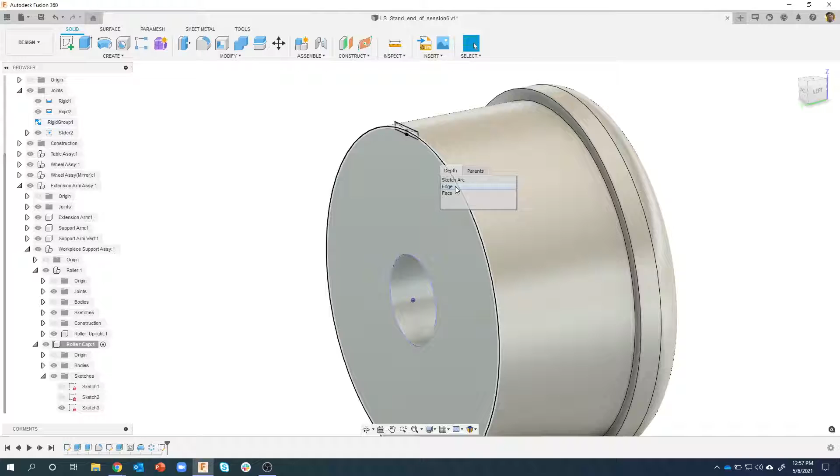Well, just click and hold, and you can see the first thing it found was the sketch arc. The next thing it finds is the edge, so I'm going to say edge, and now I see my edge commands instead of my sketch commands. So I'm going to say chamfer.

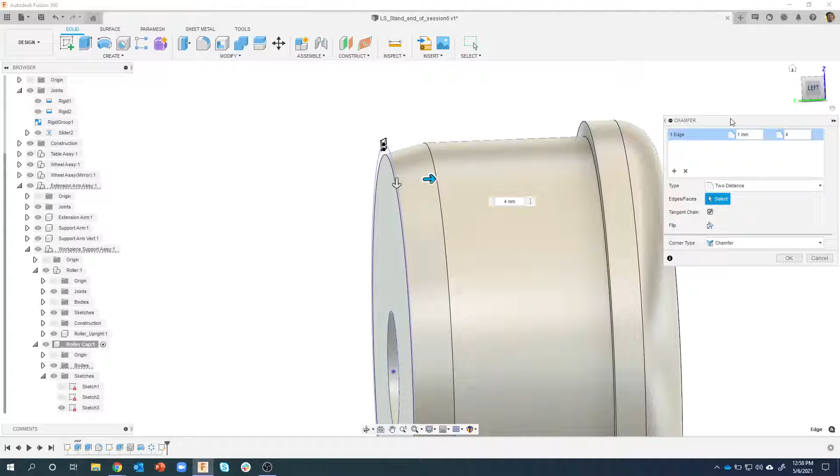I like to start to give it a slight dimension there by dragging the arrow. Well, I want this to be sloped differently, so instead of equal distance, I'm going to say two distance. And now you see I get these two arrows. I'm going to start to drag, and you can see how we can add quite a bit of slope here. Well, I don't want it to be too much, so I'm going to say let's go down 1 millimeter, and let's go over 4 millimeters or something like that. Okay, and so now we've kind of tapered that.

My sketch is still there. I'll go ahead and select those profiles, say extrude, start to drag, and we can kind of visually see what that's going to do. You can see how it's slicing into my chamfer, which is really cool. And I want it to go to this face right here, so I'm going to say to object.

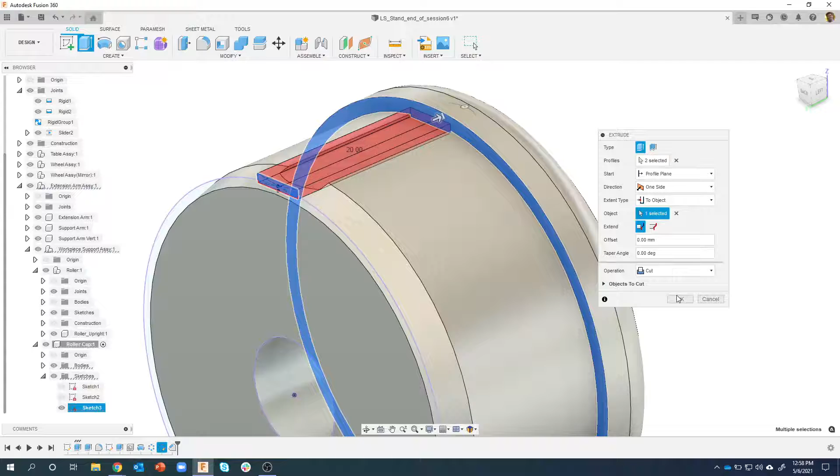Click on that face, and you'll see that it snaps right to that face. Obviously we want it to cut. I'll say OK, and we got an interesting shape just by using a rectangle, right?

Now I could have created a plane tangent to this and drawn a rectangle from the top and extruded down a certain distance. That would totally work. But since I had a flat face here, that's kind of why I drew my rectangle on that flat face and extruded back to this wall.

And just like we did with the spheres, I'm going to come in here and do a circular pattern. Again, I love to use features because I can just click on this extrude feature. It's going to select all of the faces that have to do with that extrude feature. I didn't have to manually come in and zoom up and select that face and this face over here.

What's my axis? I'll just click on that cylinder. It remembered 12 from the last time. I'll say OK, and we now have a cap that looks like this.

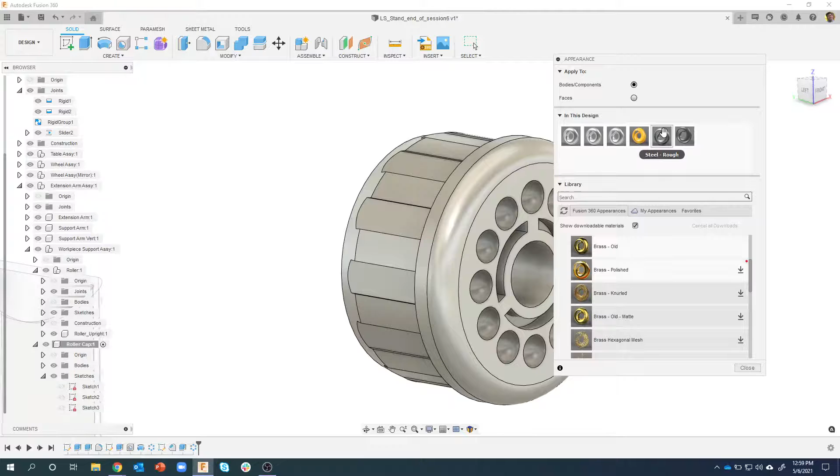Let's go ahead and add a black plastic material to it. And that's what it looks like in real life. I wish I could show it to you.

And because we kind of built it in place, if I turn this roller back on, you can see it's exactly where it needs to be.

Okay, I'm going to go ahead and put it on the other side. So I'm going to activate this workpiece assembly, and I'm going to rigid group that guy and that guy together. I want them to stay together.

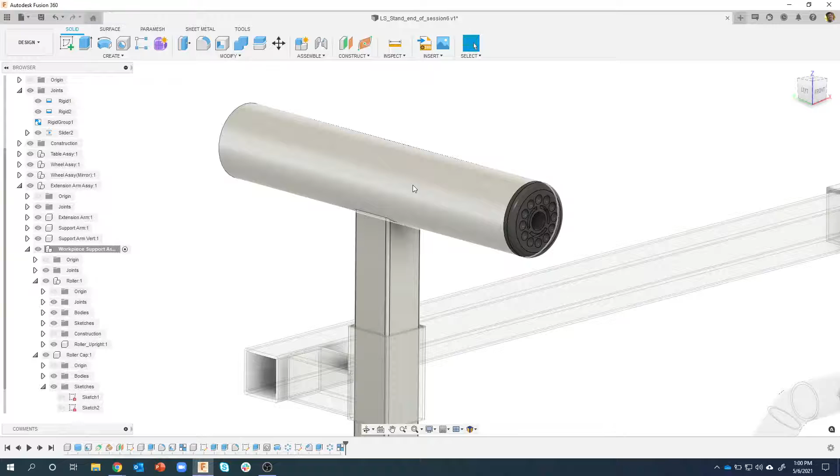So if I were to move one of them, you can kind of see that guy moves with it. But I also want to have this on the other side. So I'm going to basically be at this level here, right click on roller cap, and I'm going to say move copy.

And the first thing I want to do is say create a copy. Then I'm just going to drag this to the left. I'll rotate that around 180 degrees. And I have a couple options here. I could basically position it in here, which is what I'm going to do, or I could say OK and create a joint.

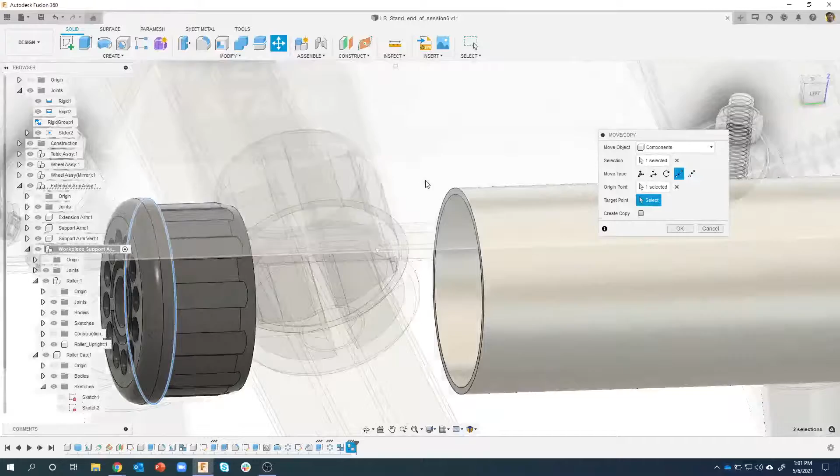Well, I'm just going to say go from point to point, and check this out. I'm going to say go from basically this edge, and you can kind of see the little plus. I'm going to hover - it's going to be down in this area right here. When I hover over that edge, you see that little plus. I'm going to say go from that point there, and then to this point here, and it puts the cap in place.

And if I wanted to, I could say rigid group. I probably should have done the rigid group after I had done that. Doesn't really matter. I'll say that guy and that guy. In fact, maybe I'll just do all three of them, say OK, and now they all move together.

I could have created a joint and positioned it in place, made it a rigid joint. That would totally work. But you can also see you can just use the move command, and since I know these are going to be rigid with each other, I just positioned them and then made them a rigid group.

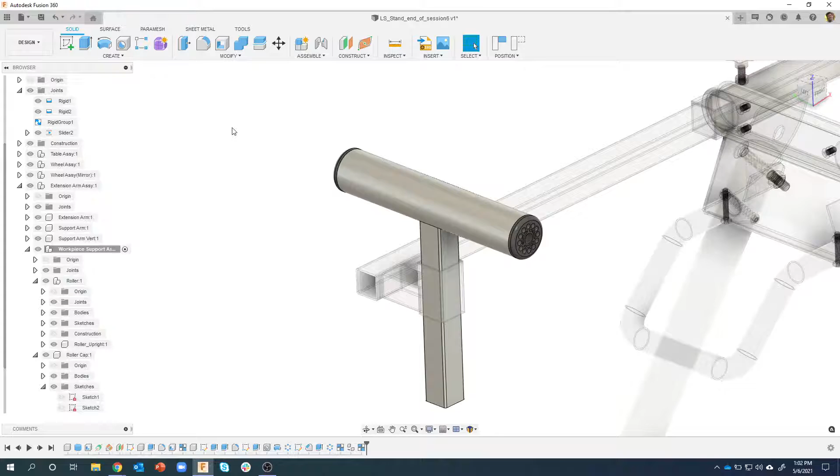Okay, so hopefully you learned something new, some new tips and tricks. I kind of went through some challenges, for example, using the thin wall extrude versus using a primitive with shell. What are the pros and cons? Hopefully you learned some stuff there. Kind of the reorganizing of assemblies where you kind of just start to build things and then reorganize them. I love the fact that you can do that.